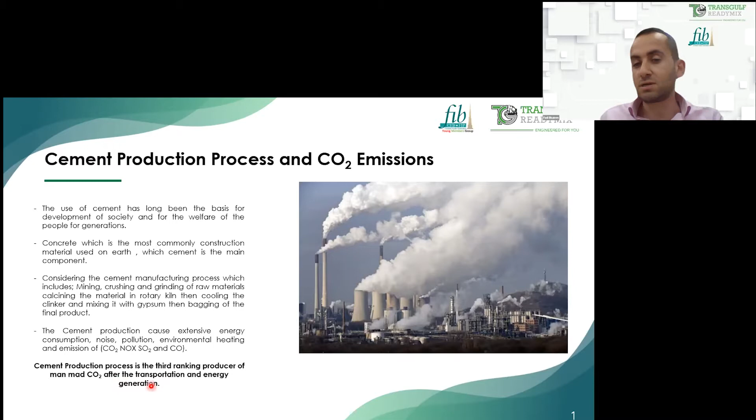As we all know, the construction industry is the main indicator for the performance of the economy of each country. The better the economy, the more the construction activity in the country. When we talk about construction, the first thing that comes to mind is the most commonly used construction material, which is concrete and the associated cement. The cement is the main component for the concrete. The cement manufacturing process includes drastic impacts on the environment: mining, crushing and grinding of raw materials, calcining the material in the rotary kiln, then cooling the clinker and mixing it with gypsum, then bagging of the final product. This process causes extensive energy consumption, noise, pollution, environmental heating, and emission of toxic gases. These days, the cement production process is considered the 3rd ranking producer of man-made CO2 after transportation and energy generation.

UAE was aware about this drastic impact, so it set regulations to make this industry more sustainable. We are starting now with Dubai's vision of sustainable concrete.

In November 2014, Dubai launched Circular 202, related to green concrete and the use of supplementary cementitious material. It was under test starting from November 2014, then it became mandatory since April 1st, 2015.

In this circular, the concrete mixes are classified into 2 categories. The first one is for substructure mixes. It did not specify any concrete grades, but specified the minimum combination or minimum cement content, maximum water cement ratio, and composition.

All the options we have here, even for superstructure or substructure, the use of supplementary cementitious material is a must. For superstructure, grades are classified starting from 25 MPa cylinder strength up to 40 MPa. Grades beyond 40 and below 25 are not covered in this circular. Same as the substructure mix, it classifies maximum water cement ratio, minimum combination, and composition, with options of using GGBS or fly ash.

After the implementation, after April 1st, 2015, industry feedback was collected to see the overall performance, and it ended up with launching a better, enhanced version of this circular in July 2018.

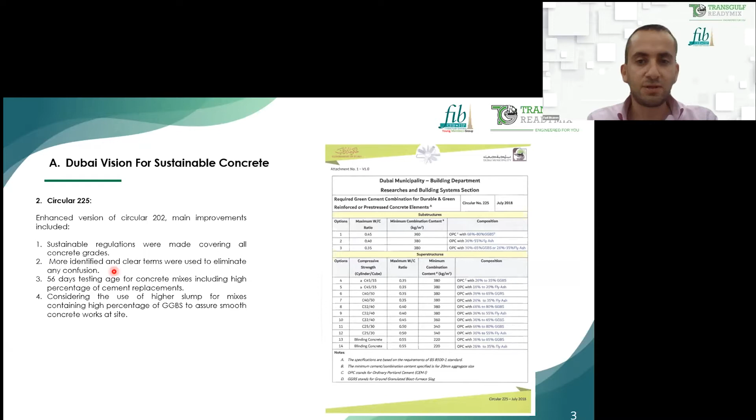One more improvement that happened in this circular is establishing baseline mixes. This allowed design engineers in the industry to be more creative, to propose mixes beyond the guidelines as we discussed before, but within sustainable baseline mixes. These mixes started from 15 MPa up to 90 MPa.

For all these options, the weighted average impact is calculated based on life cycle assessment. Design engineers have the option to propose creative mixes, going beyond the prescribed proportions, but they must still achieve the concrete strength and durability parameters, which is under the responsibility of the concrete supplier. The only approval condition here is the weighted average impact.

As an example, there are two criteria of acceptance. We have standard concrete mixes if you want to accept only one mix, or we go for a specific project as a whole. Let's start with the standard mix.

As an example, we want to propose a C40 mix, and the baseline here from the municipality is OPC plus 36% GGBS, with a cement content of 400. Maybe some suppliers can achieve it, for example, at 360. So we propose our mix and verify it, or compare it with the corresponding mix from this table.

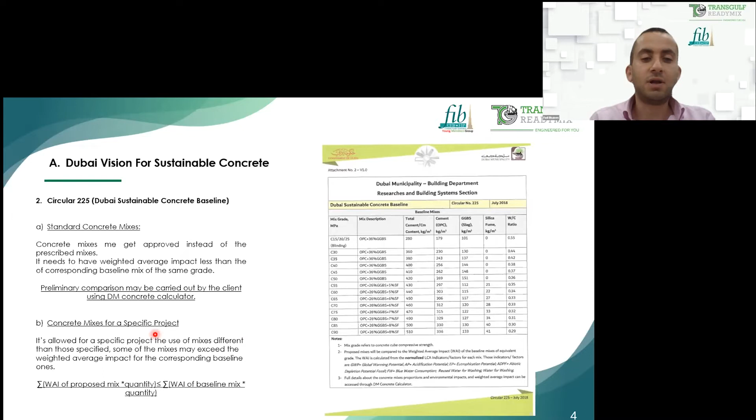Not only that, the municipality took a further step to ensure implementation of these circulars. They launched Admin Decision 316 for the year 2012, before the first circular in 2014. The main purpose of this was to assure that all available equipment is capable of producing quality concrete.

But with time, this decision kept developing, and it now includes the production of concrete complying with the sustainable circulars as well.

I want to talk a bit about this procedure. This certification scheme is to be implemented for all operating batching plants in the Emirate of Dubai. In order to be allowed to produce concrete commercially inside the Emirate of Dubai, the plant has to be approved, inspected, and certified by this scheme.

Concrete at construction sites shall be produced only from a certified batching plant, and this certification isn't a one-time thing. The certification validity is only one year. The renewal process is done for units meeting the requirements after conducting an annual audit.

So for new equipment, we conduct initial audits, then it enters a frequency of one-year audits. Not meeting the requirements will result in certification suspension, and the plant cannot produce concrete commercially. This is a must for all concrete suppliers in Dubai to follow.

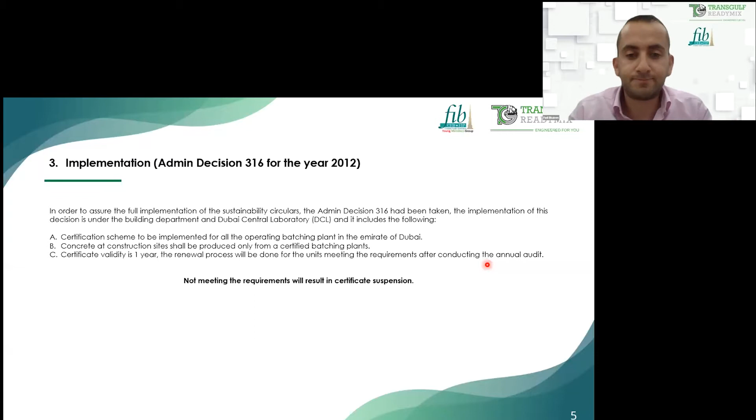I want to continue more about this decision. It includes many stages. I will talk about the stages that affect concrete sustainability. They go through the audit or checklist requirements: material storage and handling, batching equipment, central mixer, and provisions for wet weather concrete. This is what mainly affects sustainability.

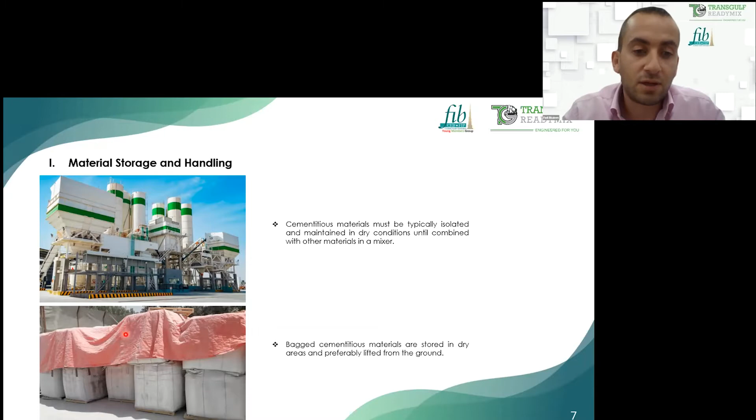They go through material storage and handling, making sure all cementitious materials are stored in suitable conditions. For example, bagged cementitious material must be stored in dry areas lifted from the ground. Aggregate must be stored in separate stockpiles with no mixing, even for the overhead bins.

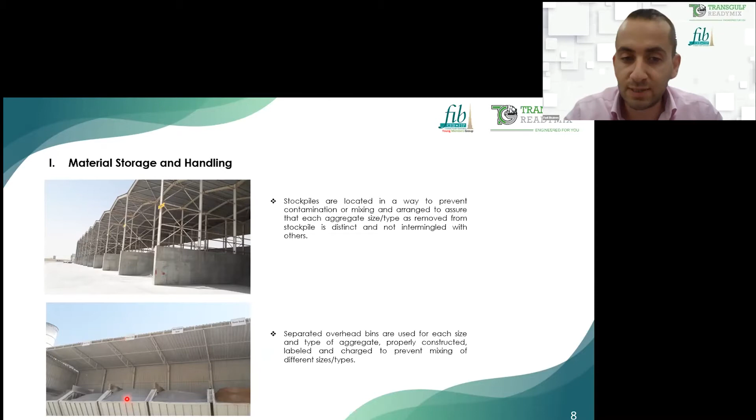Then they move to batching equipment. All the scales are verified, are in good condition, and the scales' accuracy is verified. This includes the verification for the scales' calibration.

As an example, all the scales are accurate to 0.15 of the scale capacity or plus minus 0.4 of the net applied load. This is a further investigation or assurance that all the scales are calibrated as per the standards.

Scales' accuracy is verified using certified weights, not less than 10% of the scale capacity. For example, if the scale capacity is 5 tons, the certified test weight must be 10% of 5,000, which is 500 kg, and must be used during the calibration. This is even included in this scheme.

Then, including the batching equipment, we verify the batching accuracy. For example, for the cementitious material, we have a limit of plus minus 1% of the desired weight, and for the admixture, it's plus minus 3% of the desired weight.

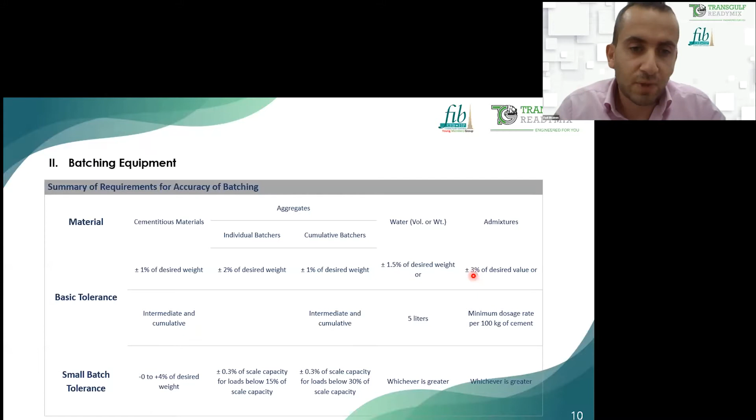This is verified by collecting data from the operating system of the batching plant. I want to highlight that all concrete suppliers must maintain the data for the whole year between the two audits or inspections. This is a must. Random data will be collected from each batching plant and verified for accuracy and material consumption, as coming in the next slide.

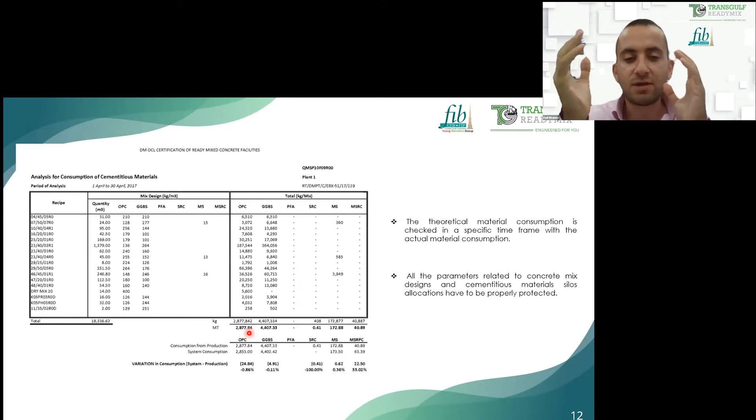Another parameter generated from the system is the actual consumption - actual OPC consumed, and actual GGBS consumed. We verify theoretical versus actual, and the variation limit is related to the scales' accuracy. For example, for cement, the variation should be between plus minus 1%.

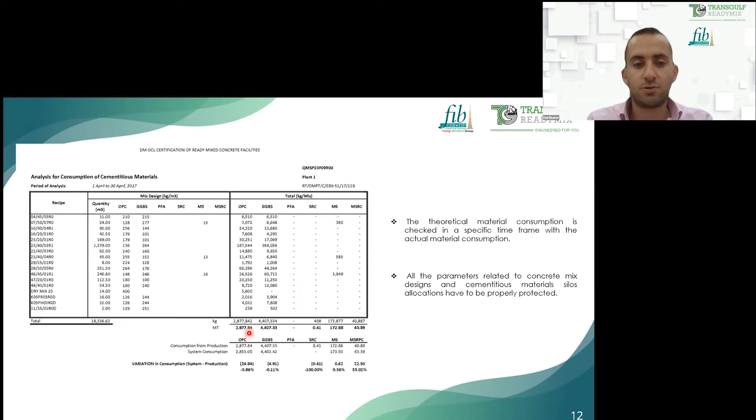We continue on the inspection procedure: provisions for hot weather concrete. I mention this because it's important to control the temperature of the concrete, since United Arab Emirates temperature during the summer can reach more than 45 degrees Celsius. So a lot of energy is consumed to cool down the temperature of the concrete.

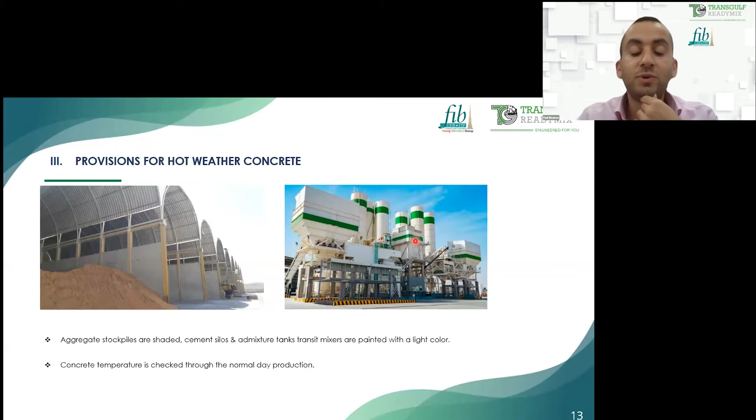We use flake ice and chilled water, shades are used for coverage, and the colors used for the transit mixers and cement silos must be light to make a difference. This is also part of the audit procedure.

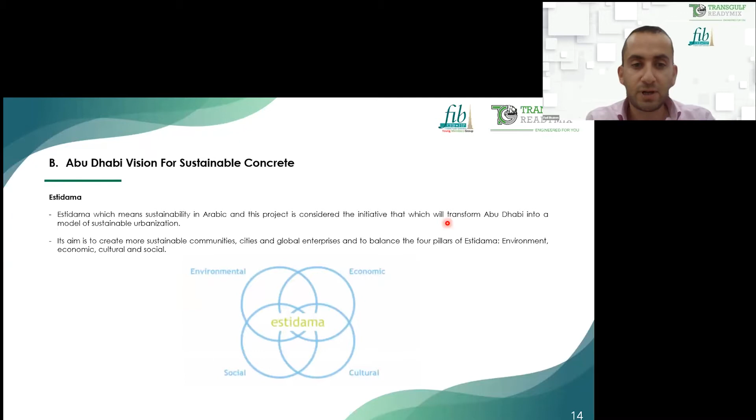Now we move to Abu Dhabi's vision for sustainable concrete. Abu Dhabi established Estidama, which means sustainability in Arabic. This project is considered an initiative that will transform Abu Dhabi into a model of sustainable urbanization. Estidama has 4 pillars: environmental, economical, social, and cultural.

The rating system for classifying products as per Estidama uses a pearl rating system, which aims to address sustainability for a given development through its lifecycle, from design through construction to operation. Meeting all the mandatory requirements or credits achieves 1 pearl, and if we achieve all mandatory credits plus 140 credit points, we go up to 5 pearls. For concrete, ready-mix or cast-in-place, it's between 1 and 2 pearls only.

About the credit points, we are coming to it now - how to achieve the highest possible credit points. The best way to get higher credit points is to reduce the cement used, including the usage of supplementary cementitious materials, including fly ash, GGBS, and silica fume as well.

This is table SM 10.1. Here in row A, we see the concrete grades. The minimum grade is 25 up to 60 MPa. Below 25 and beyond 60 is not included in Estidama.

Row B1 and B2 is for cast-in-place concrete, and this is the embodied greenhouse gases. For example, for grade 25 MPa, to achieve 1 credit, the embodied greenhouse gases generated from this grade must fall below 162. If it falls below 121, it will achieve 2 credits, and the same applies for all other grades.

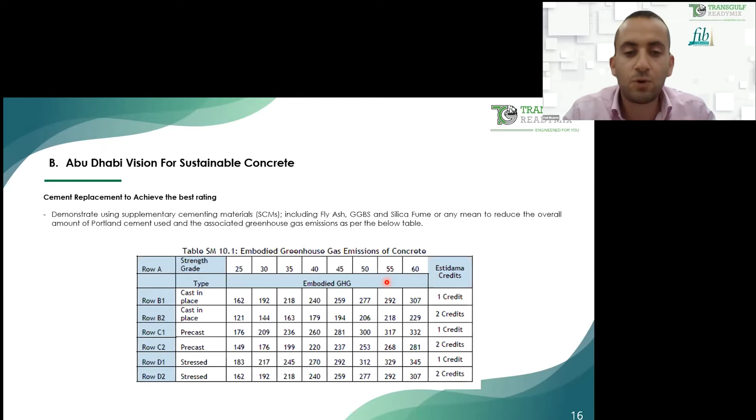To achieve more credits, Estidama allows the usage of regional material. The main aim is to encourage the selection of building materials that have reduced transport impact and promote the regional economy.

Moreover, the transportation distance traveled from the material is not greater than 500 kilometers. It will get 1 credit point if the cost of regional material is equivalent to 10% of the total material cost, and 2 credit points if it's equivalent to 20% of total material cost. So as we know, if we reduce the transportation cost, it will definitely reduce the impact of each material.

Any materials sent by air freight at any point during their transport do not qualify for this credit. Air transportation is not included. It will not give any extra credit.

Moreover, the use of recycled aggregate: we will get 1 additional credit point in case 15% of all aggregate used on site by volume in structural and non-structural applications is recycled, and 2 credit points if we demonstrate that only recycled aggregates from industrial waste byproducts are used as base, sub-base, or backfill. However, the practice of using recycled aggregate is uncommon in UAE and still under assessment.

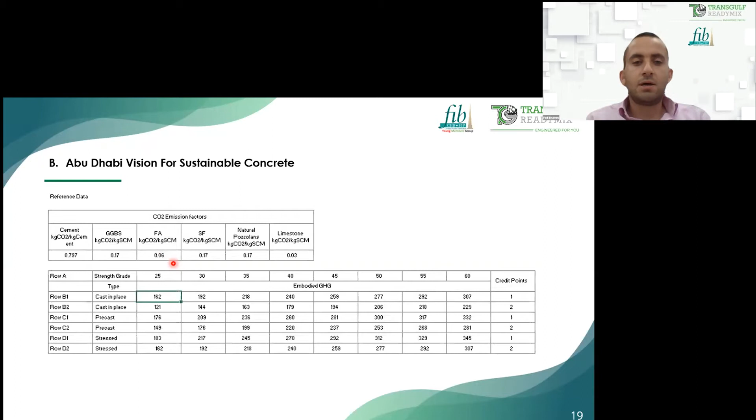Now this calculator evaluates the full project. It does not allow for 1 mix unless the project contains only 1 mix, and that's not applicable here. So this is the assessment pearl rating system for the full project. It includes all the grades, between 25 up to this project's 50, but as per regulation it's 60. And we have the quantities, volume of each mix, and the proportions for each mix.

Let's go through, as an example, the calculation for grade 25 MPa here. It represents 6%. This mix consists of 270 kilograms total of cement and cementitious material: 108 for the OPC and 162 for GGBS. For OPC, as we got from the reference data table, 108 multiplied by 0.797 gives us 86 kg of CO2 emission. For the GGBS, 162 by 0.17 gives us 28 kg.

As you can see, the mass is much higher, but the amount of CO2 emission is much less than OPC. So it will make a difference using the supplementary cementitious material. If we add both masses, we get the totals: 86 and 28, giving a total of 114 kgs.

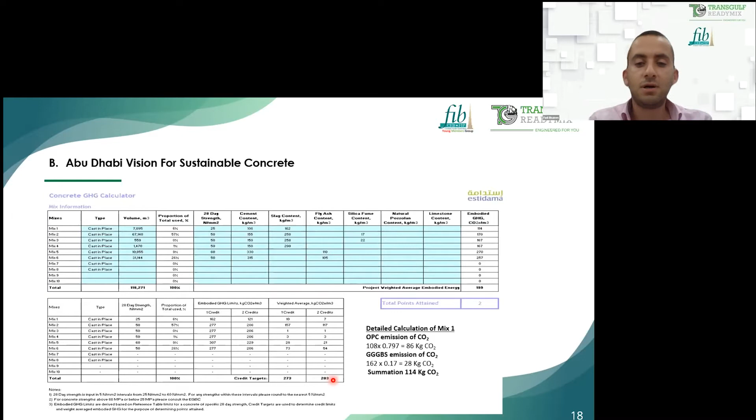So to summarize the presentation, guidelines for both practices in Dubai and Abu Dhabi. Implementation is verified, but for Dubai Municipality, the implementation is verified through audits. Inspectors go to the batching plant every year and verify compliance with the requirement.

Dubai Municipality also allows approval for a single mix, or if you want to deviate from the guidelines, you can do it for a single mix or for the full project evaluation. For Abu Dhabi, there is no follow-up or verification at the batching plant. It includes only the assessment through the calculator, and it's for the full project — you cannot classify as 1 pearl or 2 pearl for a single mix, it's for the full project.

Both models are flexible, open for creativity, and welcoming of anything as long as you achieve the weighted average impact for both mixes. I also want to highlight that the responsibility of achieving the compressive strength and durability is under the concrete suppliers.

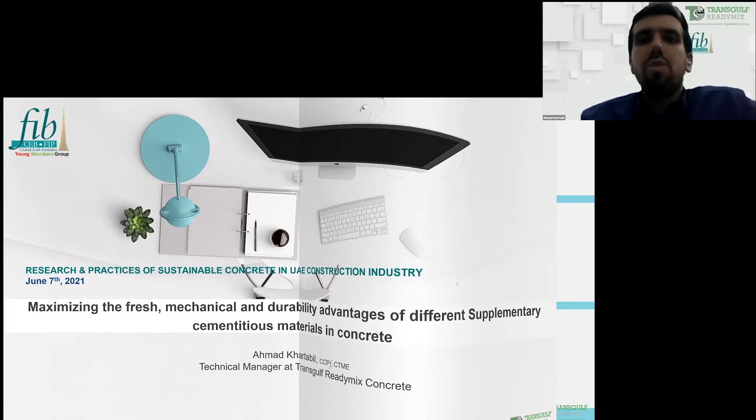First, as already highlighted by Mr. Fadi in his presentation, the common supplementary cementitious materials used worldwide in concrete are GGBS, fly ash, and microsilica. They are considered green materials, partially replacing ordinary Portland cement. Not only are these materials green, but they also increase the durability of the structures and concrete. By increasing durability, we increase the service life of the structures, so having such materials is very important in concrete.

These materials are green because they are actually waste byproducts from other industries, but they are very helpful in concrete. They react, for example, with calcium hydroxide, producing further calcium silicate hydrate, resulting in stronger concrete in terms of durability, strength, or both.

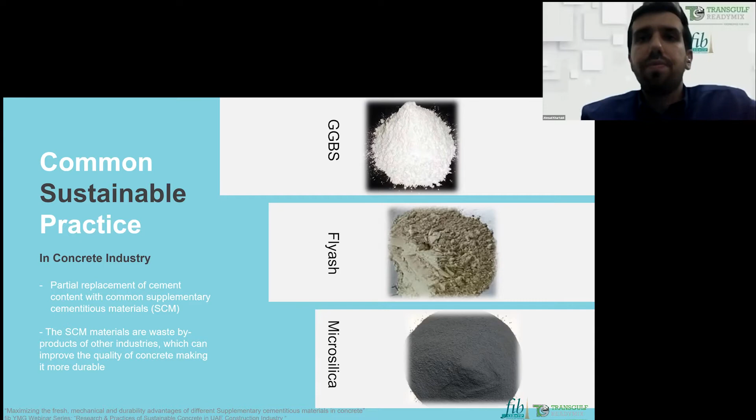Mr. Fadi highlighted the Dubai Municipality Circular, so I'll go quickly through this. We have the Dubai Municipality Circular, as highlighted by Mr. Fadi, and the two main points are to reduce carbon footprint and also to increase the service life. The target here is a minimum of 50 years for the structures, and this is based on BS 8500 and BS EN 197.

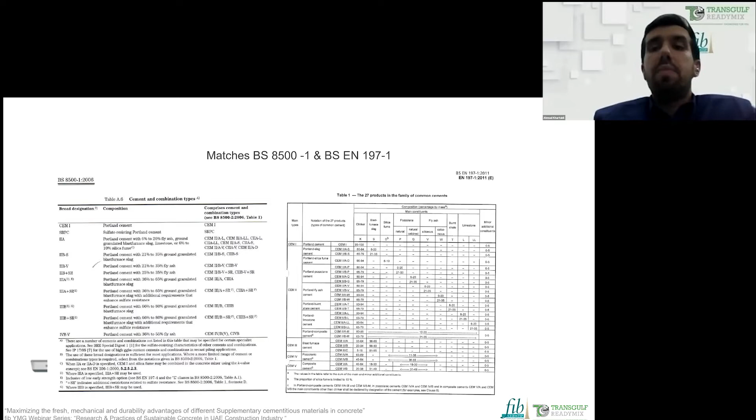So it matches the requirements from Dubai Municipality, matches the guides from BS 8500, but in this case they are mandatory in some way, as highlighted by Mr. Fadi. There is another update to the circular from Dubai Municipality in which all the grades are highlighted and reference grades were made.

Different options were introduced to have a sustainable approach to the construction industry, either evaluating the standard mix or going for a new sustainable material. They even give the option to have a new sustainable material where a life cycle assessment will be run, and a report will be generated that will contribute, and the contribution to the concrete mix will be evaluated for the project at the end.

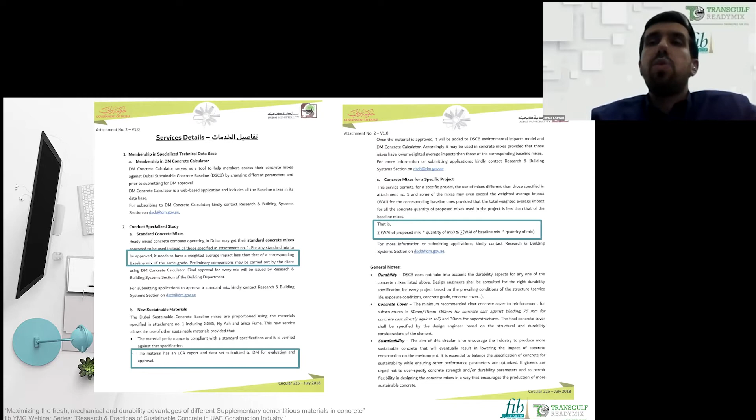The other option, as discussed before, is calculating the weighted average impact for a concrete structure or for a whole project. In this approach, for example, a blinding concrete can go without Portland cement, or grades 20 and 30 can go without supplementary cementitious material, but where there's a huge volume of one of the concrete mixes, GGBS or fly ash or any kind of supplementary cementitious material can be added, so the overall weighted average will reduce for the project. So looking at the BOQ point of view and trying to reduce CO2 emissions from the project.

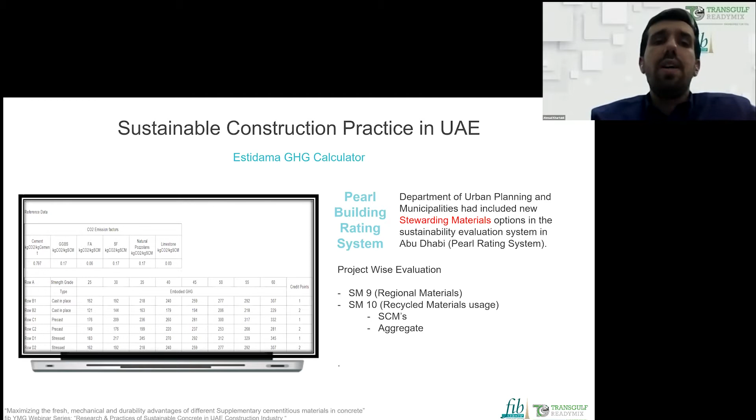So this is the Pearl rating system discussed before by Mr. Fadi. These are the main points being followed here. Through Estidama, the Pearl rating system, the projects will be having a rating system, like the project will be classified as Pearl 1, Pearl 2, and this will be considered as a green project or sustainable project. Many of the projects require 2 points or more, or a minimum of 1 point, especially for different either private or governmental projects.

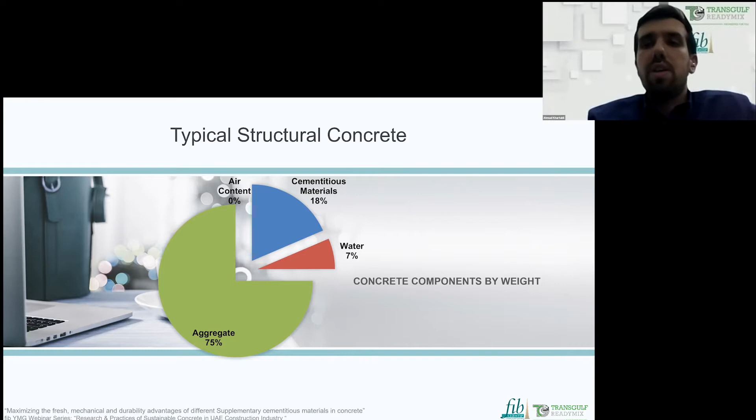As we know, concrete typically divided by weight is around 75% aggregate, 18% cementitious material, 7% water, and of course there will be air content. Here it's minimal in our region because there is no freezing and thawing.

Now I'll go to the experimental program of this study. Here we know that incorporating supplementary cementitious material, we usually face challenges. It depends, of course, on the concrete mixes, the type of supplementary cementitious material, the percentage of replacement, and also other parameters like water-cement ratio, etc.

So the main challenges I'm going to highlight are the fresh properties: workability and rheology, slump flow retention. And on the other side, the hardened properties like compressive strength, especially when we have supplementary cementitious material, where we usually face early age delay in strength, depending on the design. How do we offset this? If it's common practice, we overcome this in the design. But this I'm talking about is the property of the supplementary cementitious material when it's added to the concrete, replacing part of the Portland cement.

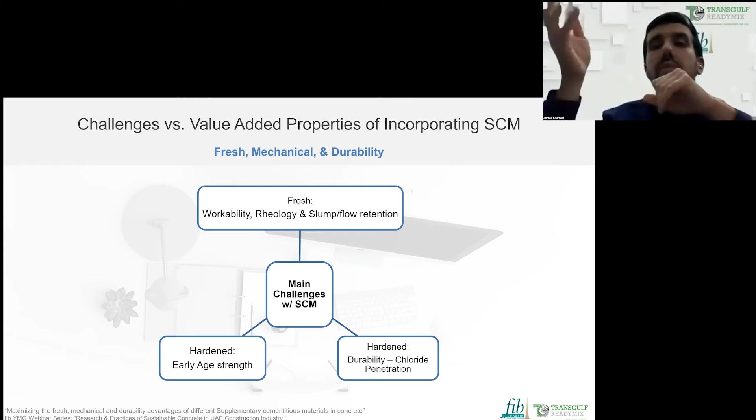And of course, durability is another hardened property that is going to be evaluated or shown in this study.

Starting with the fresh properties, or concrete workability. Concrete workability is being assessed in the industry at two points: at the batching plant or at the site, while it's being ignored or missed, I can say, after pumping, specifically when the pump is being used. And we know that most building structures use the pump normally.

So once the concrete arrives at the site, it's checked for acceptance, whether to be cast or not. Usually the check is the slump test, but the slump test is not actually a check of workability, it's a check of consistency mainly. Of course it has an indication of workability, but the true assessment of workability will be highlighted in my coming slide. And why I highlighted after pumping, because after pumping, the concrete can be affected by the pressure being applied to it.

The slump measured before pumping might differ after pumping, especially if you're using a supplementary cementitious material like GGBS. In the industry, circulars always advise allowing for a higher slump, because replacing Portland cement with GGBS at high percentages makes the concrete more viscous. This will be highlighted in my coming slide.

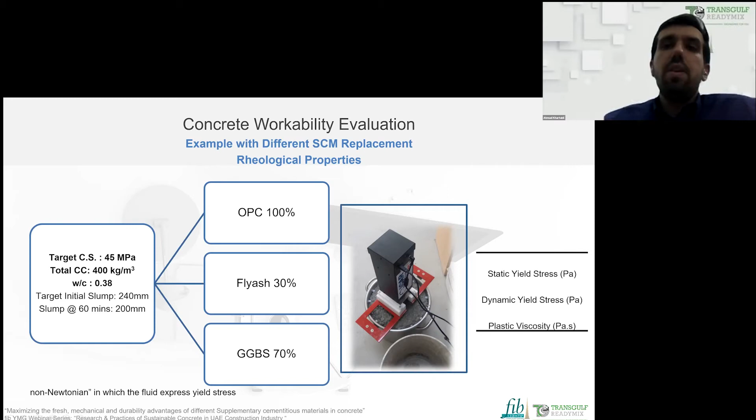While when you replace Portland cement with 70% GGBS, we notice an increase of around an additional 50% in static yield stress compared to the control mix. Similarly for the plastic viscosity.

The plastic viscosity dropped to half for the fly ash concrete mix, and increased in the case of the GGBS mix. I'm going to highlight the reason during the coming study results.

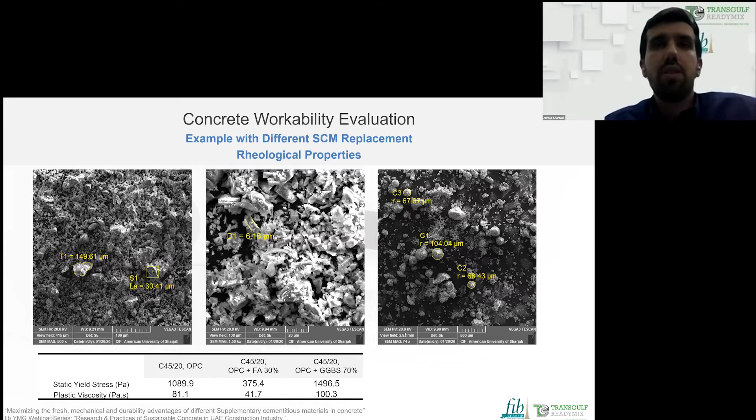Now I'll come to the durability performance evaluation. In the construction industry, durability evaluation is very common - all projects evaluate the durability of the concrete. That's why GGBS has become very common in the market, and fly ash too, especially GGBS.

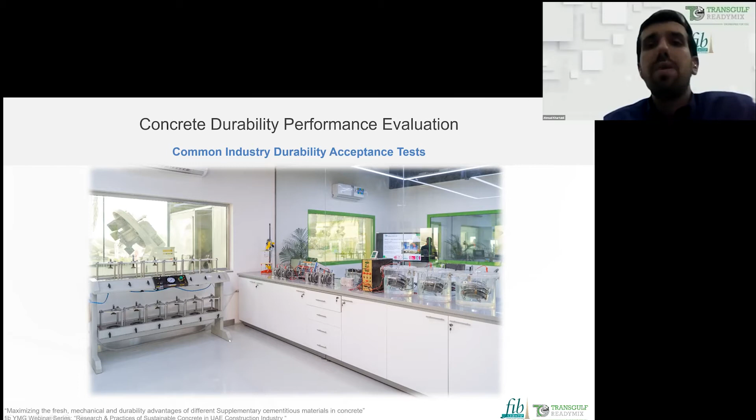This is a picture from our laboratory where we do in-house testing for all durability testing, like rapid chloride penetration, chloride migration, water permeability, water absorption, and some other tests as well. The general standard for rapid chloride penetration is ASTM C1202, and for chloride migration it's NT Build 492.

For water permeability, it's either through BS EN 12390 or DIN 1048, and water absorption through BS 1881.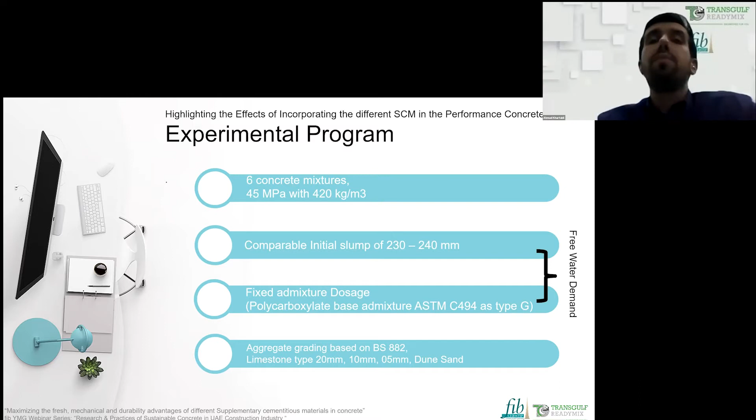We did this by determining the minimum required free water to have an initial slump of around 230 to 240. We fixed the cement content to exactly 420, and admixture dosage was fixed for all the concrete mixes, in reference to the control mix, which is 100% Portland cement.

The aggregate type used in this study is limestone, common here in UAE and available, graded to BS 882, with combined grading also. The maximum aggregate size was 20 mm.

In this slide, you can see the admixture dosage is fixed, and the cement content is exactly 420, with initial slump for all the concrete mixes targeted at 230.

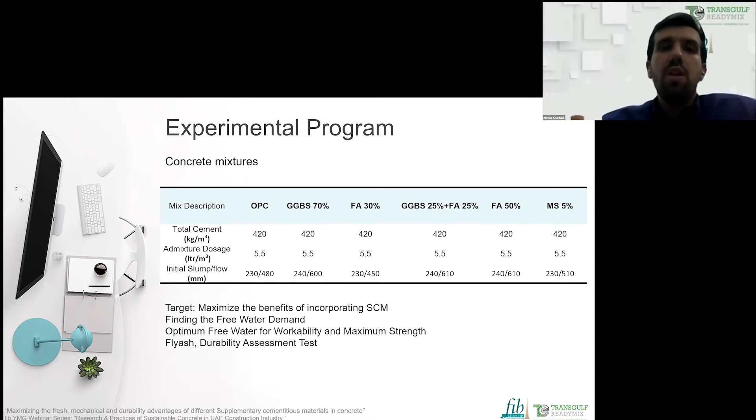As mentioned, the target is to maximize the benefit from incorporating supplementary cementitious material by finding the minimum free water demand, what we can call the optimum free water for workability, maximizing the strength, and then looking into durability afterwards.

In this study, we evaluated free water demand and slump retention based on the free water demand decided at the start, after fixing the admixture dosage, air content, fresh density, and compressive strength, along with durability. Durability is assessed at three different ages, similar to compressive strength: 28, 56, and 90 days.

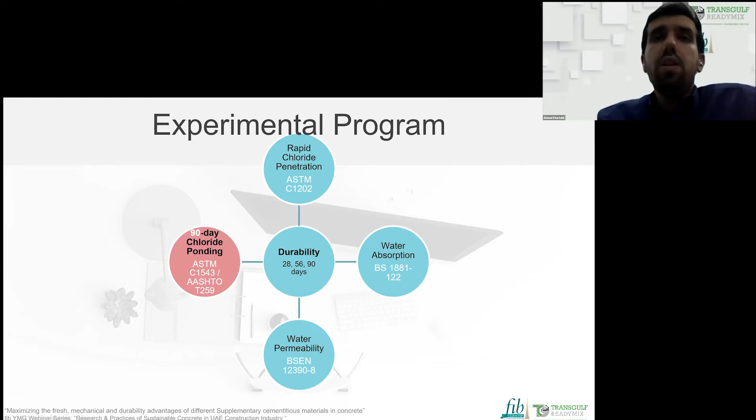For water absorption test, rapid chloride penetration, water permeability, we added a 90-day chloride ponding test, as per ASTM C1543. This is just a brief about ASTM C1543.

It's not very common because of the time it takes for preparation, and the test is performed after 90 days. Totally, the preparation and age will exceed the 90 days definitely.

Cubes were cast at 150 by 150 by 150, which are common cubes used in this research. A dam was created at the surface of the concrete at a depth of 25, and the surface was subjected to sodium chloride at the top of the surface for a thickness of 12 millimeters for 90 days.

After that, it was dried in the laboratory and drilled through two layers for the material. You can see the drilling happened to take two different samples of the powder from the concrete and send it for chemical analysis at two different levels.

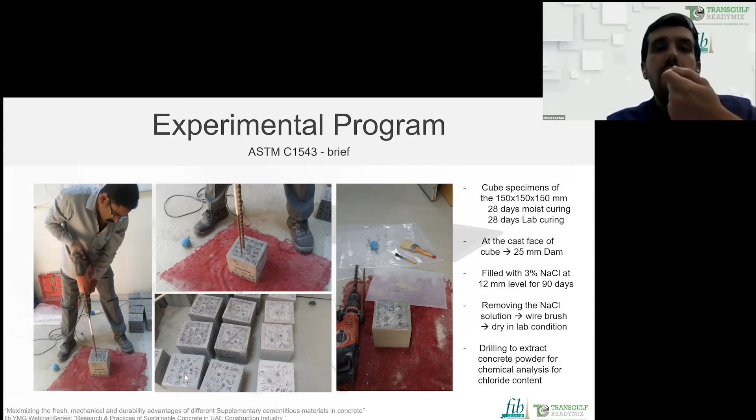One level is between 1.5 and 13 millimeters, and the other from 13 to 25 millimeters, to see the penetration of chloride and the concentration of chloride through the different levels in the concrete, and how permeable the concrete is for chloride to penetrate through it.

From the water demand test conducted, it can be noted from this figure and the values at the bottom that, at the same cement content with a fixed admixture dosage based on the control mix, GGBS increases the water demand, increasing the water cement ratio. The free water added to have the target initial slump was 150 compared to 145.

While going to fly ash, when we have a 30% replacement from fly ash, it dropped to 130 liters, ending up with a water cement ratio of 0.31. We all know that when the water cement ratio drops, the durability of the concrete will definitely be improved, and also the strength of the concrete will definitely be improved.

That's what I'm talking about, how to maximize the benefit from the different types of supplementary cementitious material. You can see that if we go for 70% GGBS and add 130, the mix will not have good workability, or will not be workable to achieve that initial slump.

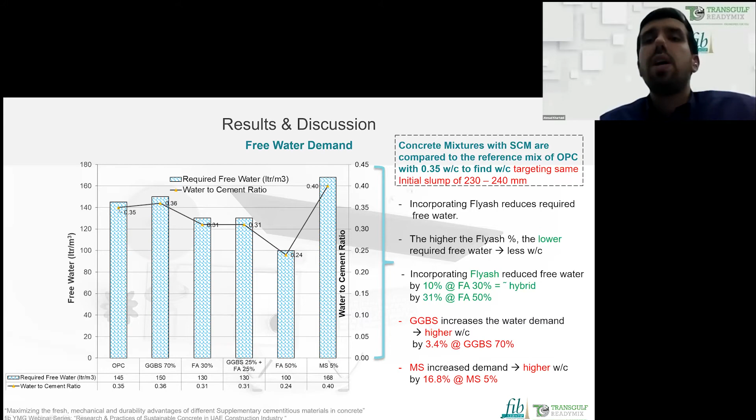Incorporating fly ash reduced the free water by around 31% when we had a 50% replacement, while it dropped the demand by 10% when we had a 30% fly ash incorporation, which was similar to the hybrid. For slump retention, all concrete mixes give a good slump retention.

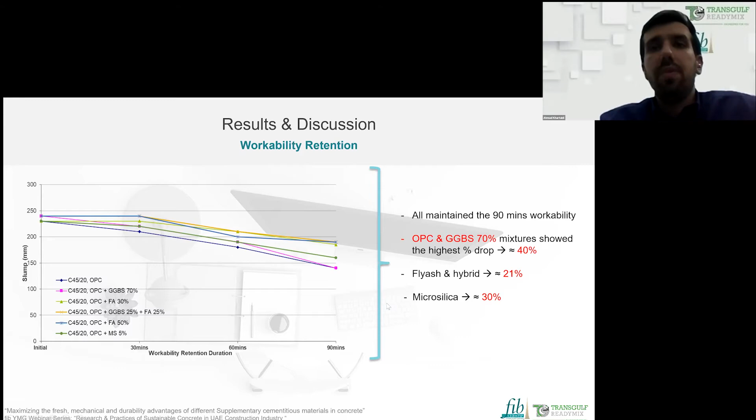All concrete mixes give a good slump retention for what was evaluated in this study, up to 90 minutes. You can see the drop is gradual, but as an observation, the drop was highest for the GGBS mix, from an initial 240, and after 90 minutes it dropped around 40%. But we are talking here about going from around 230 to 140 slump for the GGBS.

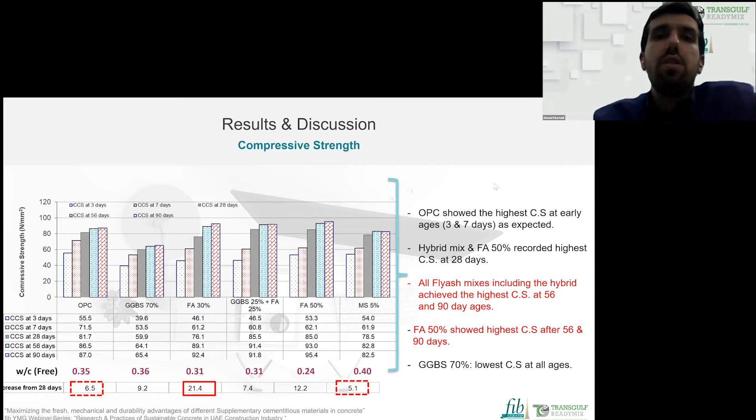An increase from 28 days was recorded, the highest for the 30% fly ash replacement, but the gain increase was between the 28 days values.

For the rapid chloride penetration test, we can see similar results in terms of the concrete, most notably with the fly ash mixes, the hybrid mixes, and the GGBS mix. You can see the huge difference between these supplementary cementitious material mixes compared to the plain concrete.

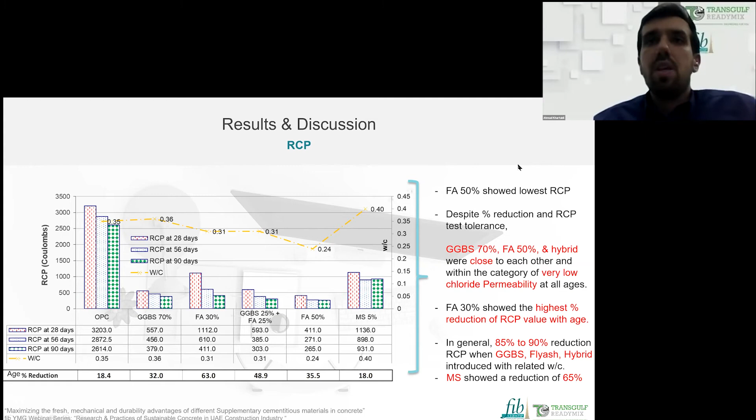Similarly, we evaluated the 90-day chloride ponding. There was no clear relation here with the water cement ratio for this part of the study. However, noticeable chloride penetration on the second layer in the OPC was the highest, at 0.024 concentration, while the rest were very low, remarkably low to be measured. It was identified as 0.006.

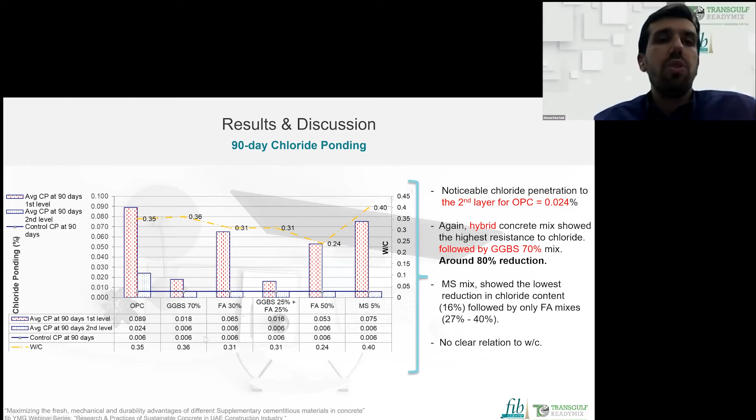In this part of the study, we're trying to find the correlation between the RCP, rapid chloride penetration, and 90-day chloride ponding. Of course, this needs more data, more concrete mixes to be evaluated, but this confirms earlier studies that there is more correlation at 28 days between the RCP and the chloride ponding test. Further samples need to be done and evaluated, but we can see that the coefficient of determination was very low: 0.49, 0.53, and 0.47 at the different ages evaluated.

So this ends my presentation. In summary, I just wanted to highlight that the target of this study is to see the benefit of having fly ash, GGBS, or a hybrid concrete mix between GGBS and fly ash on the performance of the concrete, either durability or strength. We can see that mostly whenever we have supplementary cementitious material, we increase the strength, except when it was GGBS, because the GGBS was at a high percentage.

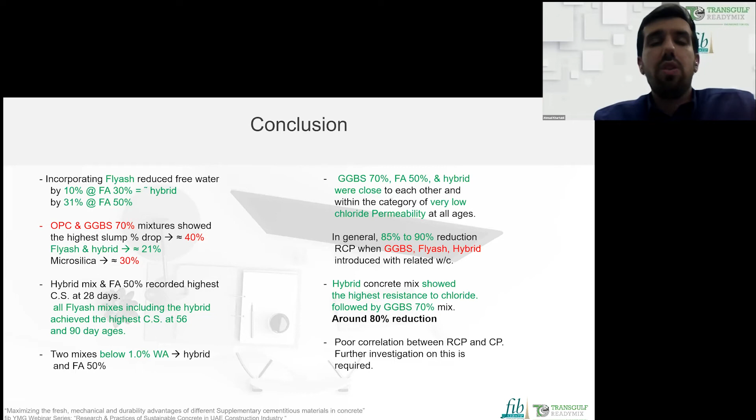Of course, we are comparing in terms of effectiveness, and we are going to the high-end replacement in reference to the standard, regulation, and guidelines. The water absorption was very low for all the supplementary cementitious material concrete mixes, as was the rapid chloride penetration. So this is my presentation. Thank you very much, feel free to ask questions.

Therefore, the objective of this study is to investigate the viability of replacing natural aggregate with recycled aggregate, and replacing fresh tap water with treated wastewater in producing concrete—a sustainable concrete made with recyclable materials—and studying the mechanical properties and durability of the produced concrete.

From the literature, it was found that 20 to 30% replacement of aggregate results in negligible effects on the mechanical properties of concrete. It was also found that curing conditions and levels have a great impact on the mechanical properties and durability of concrete specimens.

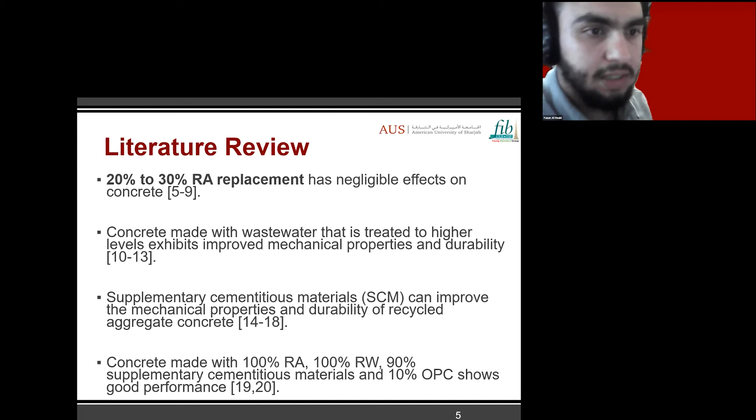Previous research has shown that the properties of concrete made with recycled aggregate can be improved with the use of supplementary cementitious material. Few studies show that using 90% supplementary cementitious material and 10% OPC can produce concrete made of 100% recycled aggregate and 100% recycled water with good performance, without losing any of the strength of the concrete.

So the parameters considered in this study will be the aggregate type, where a normal aggregate will be compared with the recycled aggregate and the 20% replacement. The recycled aggregate was obtained from Bee'ah, a leading integrated environmental and recycling waste management company in the United Arab Emirates. The recycled aggregate produced by Bee'ah is produced from the construction and demolition waste in the country.

The second parameter that will be considered is the mixing water, where we will consider using fresh tap water against treated wastewater. Curing and exposure conditions will also be a parameter where the mixes will be exposed to tap water, treated wastewater, and salt water with 6% salinity. The use of salt water is to simulate the harsh environment condition.

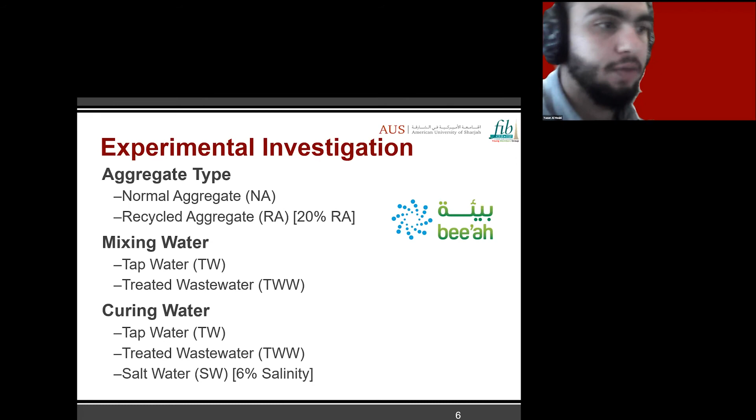So a total of 4 mixes were developed, which are natural aggregate mixed with tap water, natural aggregate mixed with treated wastewater, recycled aggregate mixed with tap water, and recycled aggregate mixed with treated wastewater. Each of these mixes are replicated 3 times for the 3 different exposure conditions, which are tap water, treated wastewater, and salt water, making a total of 12 mixes.

These mixes will be used to investigate the effect of 20% recycled aggregate replacement, to investigate the effect of treated wastewater as a mixing water, and to investigate the effect of the different curing and exposure conditions, as well as to investigate the combined effect of using treated wastewater and recycled aggregate in concrete mixes.

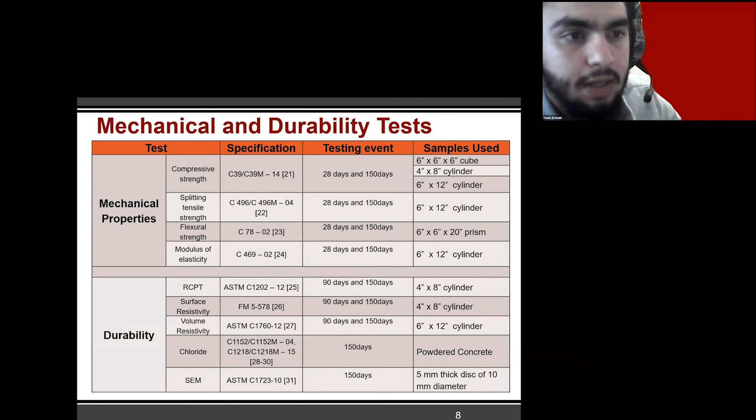Each of the 12 mixes produced enough samples for the mechanical and durability tests, where cubes and cylinders were cast for the compressive test. Cylinders were used for the split tensile and modulus of elasticity test, and prisms were cast for flexural test. For the durability tests, mainly 4-inch by 8-inch and 6-inch by 12-inch cylinders were used on different tests, which include the surface resistivity, volume resistivity, chloride content, and RCPT, as well as the SEM.

The material properties of the natural aggregate as well as the recycled aggregate were summarized in this table, and the plot for the size distribution for the different aggregate blends, which are the 20 mm, 10 mm, the normal aggregate blend, and the recycled aggregate blend, can be seen in this figure. All aggregate blends demonstrate a well-graded distribution.

The test results show that the RA has a much higher absorption ratio and moisture content values than the natural aggregate, owing to the higher porosity of the recycled aggregate as compared to the natural aggregate. However, both recycled aggregate and natural aggregate have aggregate crushing values not exceeding 25%, which classifies them as strong aggregates.

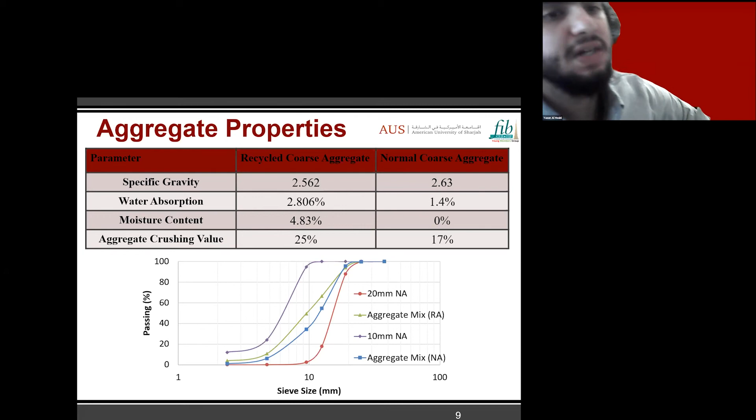A preliminary mix was performed to ensure that the mix design developed meets initial criteria set by the ASTM guidelines for mixing with the treated wastewater. As can be seen in this table, the water used was able to meet those criteria, where the initial setting time was only 3.5 minutes later, and the compressive strength was around 92.1% of the controlled specimen.

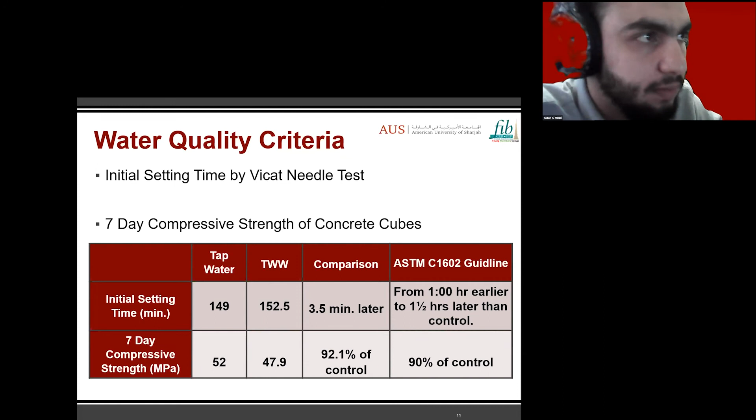The mechanical tests that were conducted in this research were the compressive strength, the split tensile, the flexural strength, and the modulus of elasticity. Some of these results will be discussed in this presentation.

Looking at the compressive strength, almost all results, all mixes have comparable and very close results, with reduction or improvement of strength up to 10% maximum. Some trends can be drawn by looking at this graph. For example, in general, curing with treated wastewater and salt water resulted in a reduction in the strength of concrete samples.

Comparing different groups from this figure, we can draw the effect of using recycled aggregate and also the effect of mixing water.

For instance, comparing groups 1 and 2, we can draw the effect of the mixing water. And also comparing groups 3 and 4, we can find the effect of the mixing water.

Comparing groups 1 and 3, we can find the effect of the aggregate type. These comparisons show that very little difference can be seen, which also complies with the literature review, which suggests that 20% replacement of recycled aggregate has negligible effect on the compressive strength.

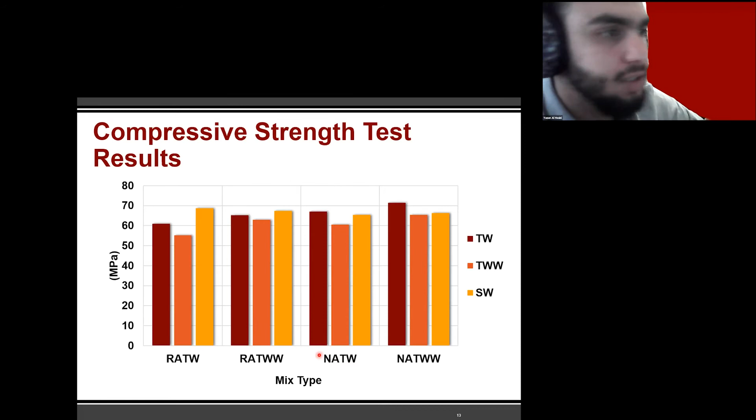All samples were observed to have acceptable and similar failure modes to that of the control mix under compression. Some of the failure modes can be witnessed from the photos shared in this slide.

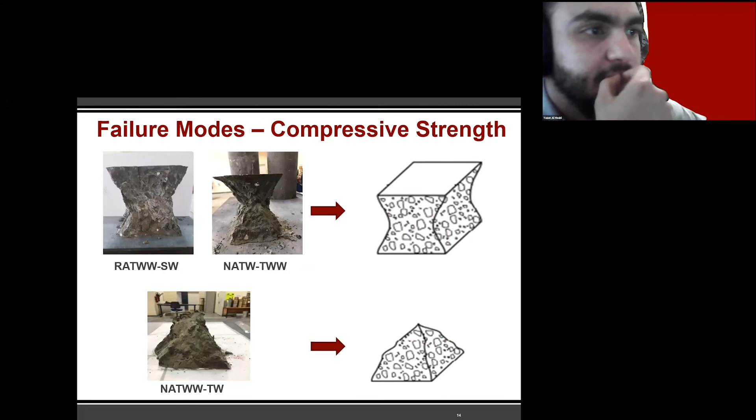Overall, the results of the mechanical tests observed that the concrete made with only 20% replacement has very comparable results with the control specimens.

Moving to the durability tests, which is part of the focus of this study, the tests performed include the RCPT test, the surface and volume resistivity test, the chloride content test, and the SEM.

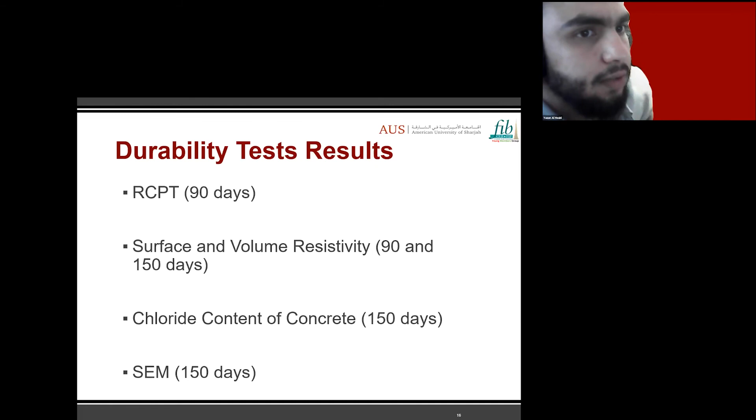The RCPT test measures the concrete's ability to resist chloride ion penetration and thus provides an indication of the concrete durability. Following the ASTM standards, the RCPT test is performed on a small disc specimen with a diameter of 100 millimeter and a thickness of 50 millimeter.

The standard provides a classification for each range of charge passed, and it can be summarized in the table seen in this slide.

The results indicate that the 12 mixes are classified under the very low permeability class, as they lie within the range of 100 to 1000 coulombs as per ASTM C1202. This implies that all mixes are considered durable in terms of chloride ion penetration, and the use of 20% recycled aggregate and treated wastewater can be considered in concrete subject to all different environmental conditions.

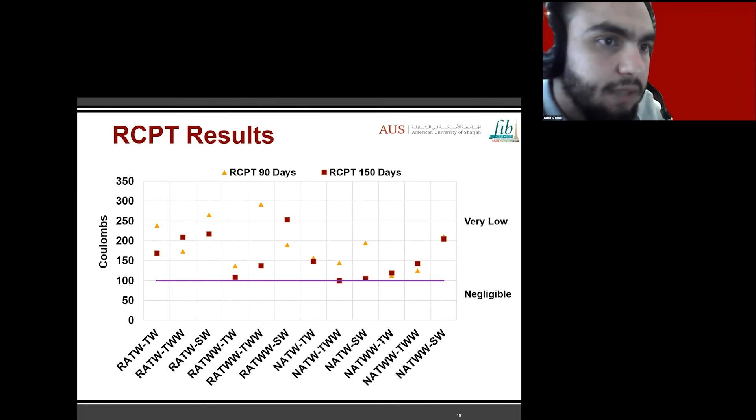From this figure, it can be better visualized where each test sample lies within the range provided by the ASTM standard, and it can be seen that all samples are within the very low region, and even they are very close to the negligible region.

Another test that was performed was the scanning electron microscope, which is a very powerful and useful tool that was used in this research on the concrete samples to check several aspects such as the cracks and cavities present, the chemical composition of concrete, the homogeneity of cement paste, and the adhesion between aggregates and cement.

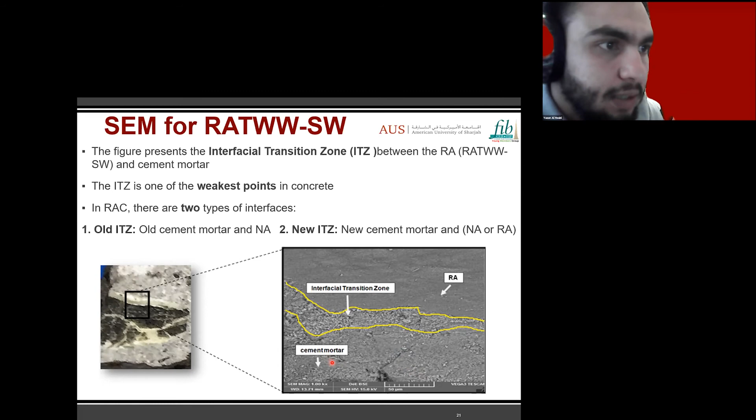In conclusion, using recycled aggregate and treated wastewater did not result in major drawbacks on the mechanical and durability properties of concrete. The RCPT test showed negligible or very low chloride ion permeability, which is a good indication of durable concrete. And finally, the highest chloride content was observed in the most severe mix, which corresponds to recycled aggregate mixed with treated wastewater and subjected to or exposed to salt water.

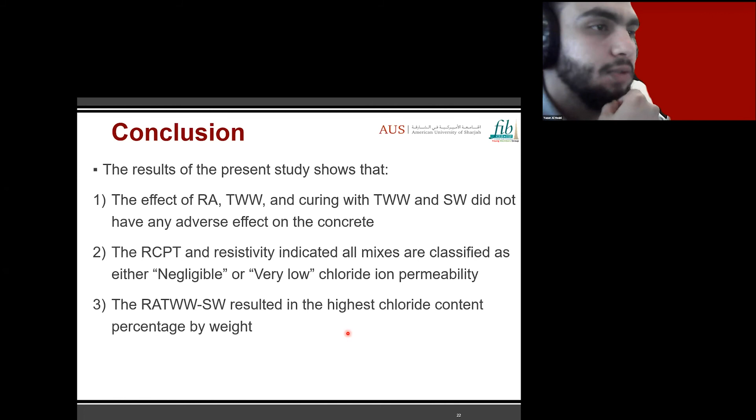Due to the time limit of this presentation, I wasn't able to share all the results. However, for those who are interested, the complete results of this study can be found and accessed in the published paper in the Construction and Building Materials Journal. These are the references. And if you have any questions, please ask.

Excellent presentation, Mr. Yazan. Let's take a look at the chat and see if anyone has any question for you. All right, so no questions so far. Maybe towards the end of all the presentations, maybe someone will have something.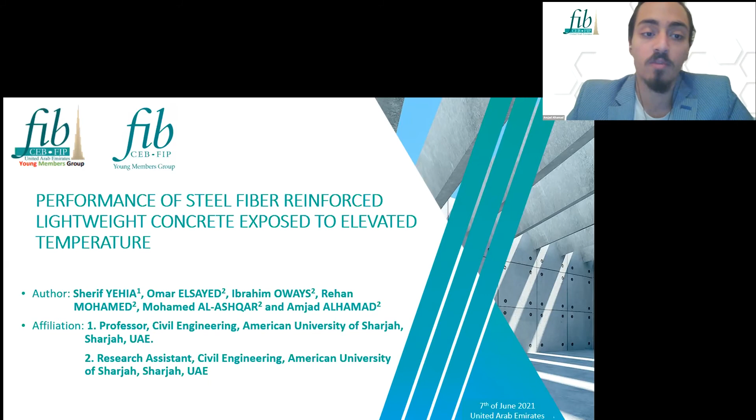The outline of this presentation is as follows. First, we're going to present an introduction and background to the topic. Then we'll follow that with the objectives of the study. We will shed some light on the experimental program, share with you our results, and discuss them. Then we will conclude at the end of the presentation.

Now, to begin with, we must understand how common fires are in terms of where we live, which is a well-developed country like the United Arab Emirates. We find that there were more than 5,000 fires between 2008 and 2016, all related to residential units, commercial stores, industrial plants, and government establishments. So think about that—those are all important civil engineering structures.

Now, given how common fires are, we as civil engineers need to study the behavior of concrete under elevated temperatures in order to avoid serious damage to the structure. Because if the concrete is not able to handle certain temperatures, our buildings might not be able to stand in case of fire, and will in turn put human lives at risk.

This is important for sustainability since we are improving the durability of concrete. So we'll have concrete living a longer life under extreme circumstances, given how common fires are, obviously.

Just in 2018, we had a high-rise building in Brazil collapse entirely into nothing after paying millions of dollars on that high-rise building. It fell just because of a single fire. So it's not something to bypass as civil engineers.

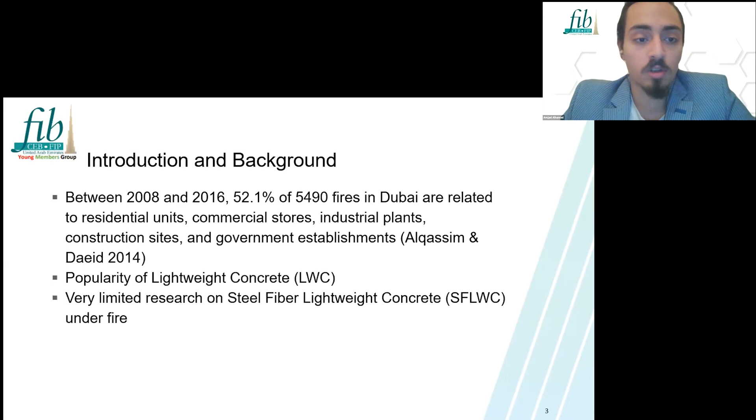And we wanted to also focus on lightweight concrete because here in the United Arab Emirates it's becoming more popular since it reduces the dead load. And we wanted to include steel fiber into our project, because the studies on steel fiber are limited. So we want to contribute to the literature in a better way.

Now, in the literature, we found that concrete mixes—we had to look into it earlier. We had to look into the binders and the fiber before deciding on what to go on with our study.

In the literature, we found that concrete mixes containing silica fume retained more of their strength at every temperature than metakaolin. This is obvious because of the nature of the silica fume: it comes from silicon, which comes from high purity quartz, while on the other hand, metakaolin is an anhydrous form of clay mineral kaolinite. It is less resistant to fire than silicon. So it's clear that silica fume will retain more of its strength at every temperature.

Now, in terms of steel fibers, it was clear from the literature that there were advantages and disadvantages. The advantages could be, for example, enhanced bond, enhanced crack controlling, and clearly enhanced flexural strength. However, at higher temperatures, the fibers will elongate and will in turn create large internal stresses within the concrete, damaging the concrete from the inside, causing spalling.

It will increase the risk of spalling. However, a lower melting point can reduce the risk of spalling. We will touch on that later on.

And one clear variable in the literature was the difference in cooling methods. Many people are using air cooling, or cooling naturally—meaning taking the samples outside of the furnace, leaving them on the side without applying any air or water, just letting them cool at room temperature. This is fine, but you also need to study water cooling, because it is more representative of real life cooling. When firefighters come, they don't just sit there and wait for the fire to cool on its own—they pour water on it, or use fire extinguishers. So there are different types of cooling, each of which we'll touch on later, and each will give different results.

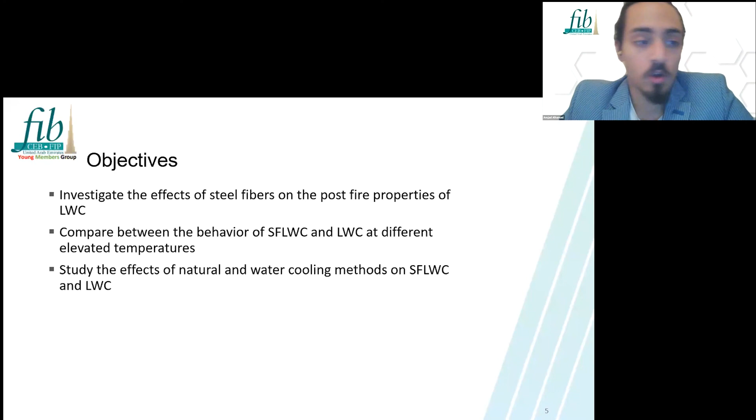Now, the objectives of this study are to investigate the effects of steel fiber on the post-fire properties of lightweight concrete. We're also going to compare the behavior of steel fiber lightweight concrete against normal regular lightweight concrete as a control mix at different temperatures, and compare the effects of natural and water cooling. We picked those two because they were the most common in the literature.

Now, onto the experimental program.

Here, as I said, we have one control mix for the lightweight concrete and one where the effects of steel fiber will be discussed and compared. So we'll have two mix designs.

We cast our samples at the Gulf Ready Mix Concrete plant in Dubai. These samples were prisms of 100 mm by 100 mm by 500 mm. We cured the concrete in water for 28 days, then left them to dry for 14 days.

After that, we put our samples in a muffle furnace we have at the American University of Sharjah. We heated them at 3 different temperatures: 200 degrees Celsius, 500, and 800, at 10 degrees Celsius per minute. This rate was chosen because of how common it is in the literature.

We had 8 samples for every temperature, 4 for lightweight and 4 for steel fiber lightweight concrete.

After heating, we took the samples out of the furnace and subjected them to either water cooling, which is just dipping them in water, or we left them to cool naturally in air. For testing the prisms, we placed each prism in a standard 2-point load flexural machine with a loading rate of 0.1 mm per minute as per the ASTM standard.

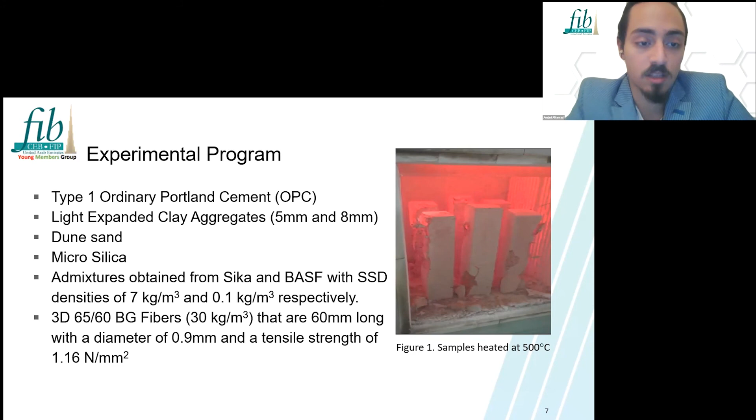They have 60 mm length and a diameter of 0.9 mm with a tensile strength of 1.16 Newton per millimeter square. Here is a video I would like to share with you of one of our team members.

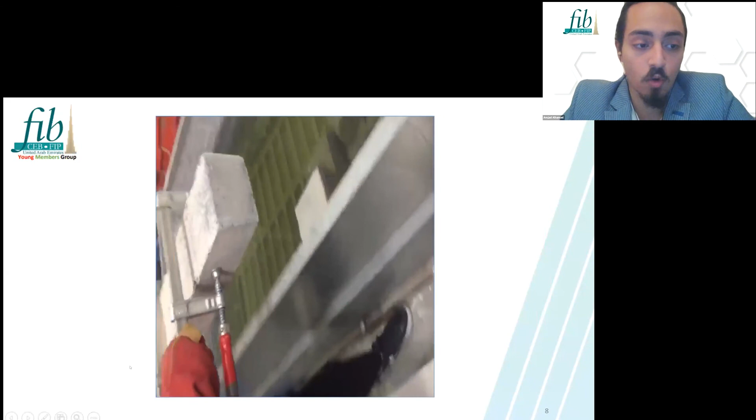He's quenching the concrete in water after heating it to elevated temperature. As you can see from the video, it almost evaporated instantaneously because of how hot the temperature is. And we will share with you some of the results we had because of water cooling.

Both the lightweight and steel fiber lightweight, in terms of color, first we have to share general results, then we'll talk about the flexural capacity or residual flexural capacity. Both the lightweight concrete mix and steel fiber lightweight concrete mix, the prisms in both mixes changed to darker color at 500, then returned to the light color at 800 degrees Celsius.

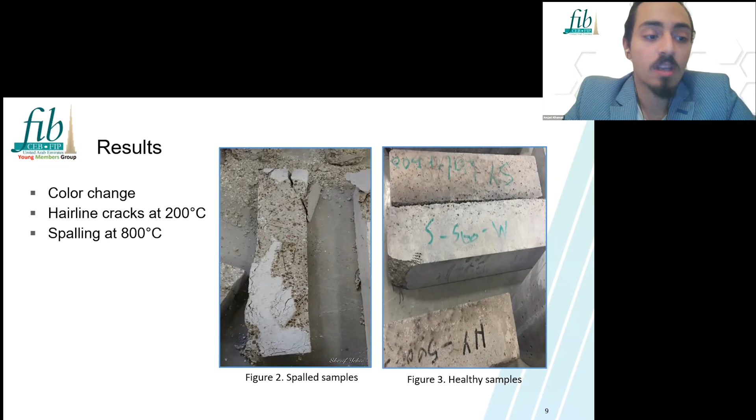In terms of the element itself, the concrete started to develop hairline cracks at 200 degrees. Then at 500, the cracks become more uniform on the concrete surface. Plus at higher temperatures, such as 800, which is the highest temperature we had in this study, a few samples spalled inside the furnace. These are just observations of the elements so far.

Another important observation: during the heating process, we had a trial run initially, and we noticed, just as found in the literature, that whenever you put the samples close to each other in the furnace, this will skew your results. For example, if you look at the left, we tried putting many samples, in fact 12 samples, close to each other.

This had an effect on the concrete itself, and as you can see, at 500 degrees, they all broke because of the temperature gradient. When they're closer to each other, the temperature gradient will have an effect. So we decided to put 6 samples at a time and increase the spacing between them.

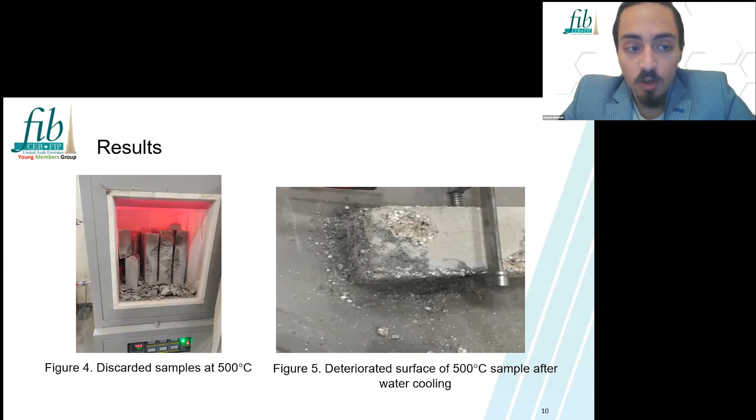Now, for the picture on the right, at 500 degrees Celsius, when we water cooled some of the samples, as you saw in the video, their surface deteriorated. This is because of something called thermal shock that we will touch on later.

Then they started to lose their strength again until at 800 degrees Celsius, both of them failed completely with no strength at all. For water cooling, on the other hand, the results are slightly different.

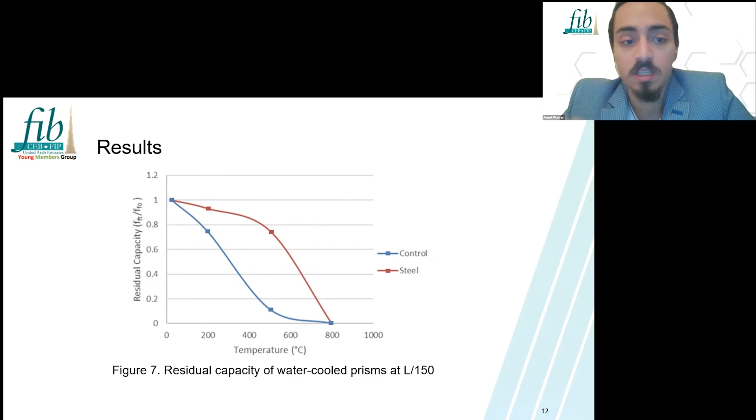Now onto the discussion. We found a study in the literature that has a similar increase in strength, but they used reactive powder concrete.

When they added fibers, they yielded a 24% increase in strength. However, in our case, we had a 45% increase. This could be attributed to several reasons.

One reason is the enhanced bond and early crack control gained by the elongation of steel fiber at early stages only, at 200 degrees Celsius. It could also be due to the additional hydration of cement, silica fume, or silica added in the study, which creates additional calcium silicate hydrate, or CSH binder.

This will enhance the bond between the aggregates and steel fibers, giving more fire resistivity. For regular lightweight concrete, we saw no increase at early stage. This might be due to the highly porous nature, which could reduce the effect of the additional binder, creating a balancing effect between higher porosity and lack of fibers. So we conclude the increase was due to a combination of steel fibers and additional binder.

As expected, steel fiber lightweight concrete showed hairline cracks at early stages of heating and was more vulnerable to cracking, because of the major internal and external stresses created by the elongation of the steel fibers at 500 degrees and more.

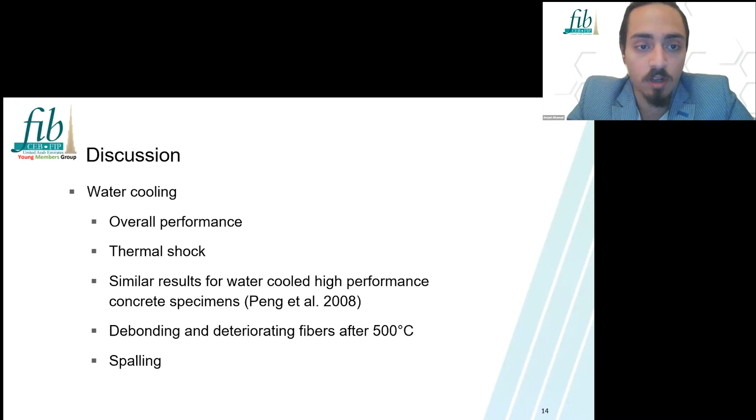Now to conclude our presentation, we can clearly see three main points: that the fibers in fact improve residual capacity at every temperature. Using steel fibers is always better than not using steel fibers.

A comparison between air and water cooling shows that water cooling, which is more reasonable because it is what happens in real life and is more practical, will have a significant effect on the concrete and will show a reduction in strength. So different types of concrete need to be studied in order to battle this effect of water cooling.

The third conclusion is that binders will always have a positive effect on the residual capacity of the concrete.

I saw a question in the chat asking about GGBS under elevated temperature. GGBS is just like silica fume - you have to look at its regular benefits and its reduction of CO2. But when you look at elevated temperatures, it will also have an effect, just like silica fume or metakaolin. They will most likely show an increase in strength because of the additional binding material they create when heated.

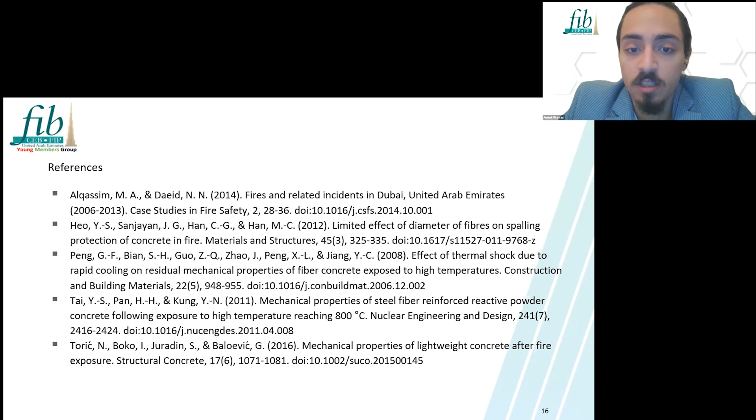Excellent presentation, Mr. Amjad. Let's take a look at the chat to see if there's any question for you. All right, so I don't see any questions so far.